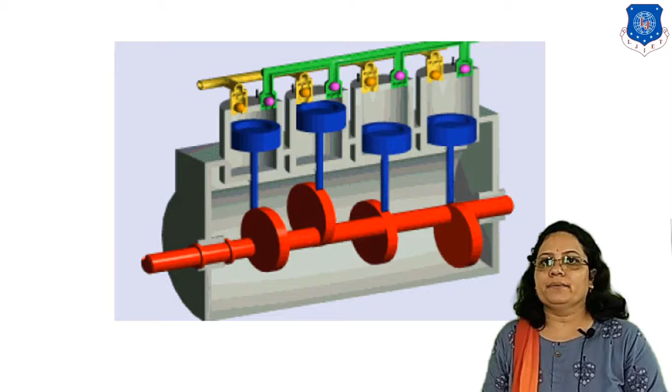This is on internal combustion engines. In the previous lecture, we covered the design of piston, function of piston, material for the piston, design of piston head, piston crown, and piston pin. In today's lecture, I will cover the connecting rod.

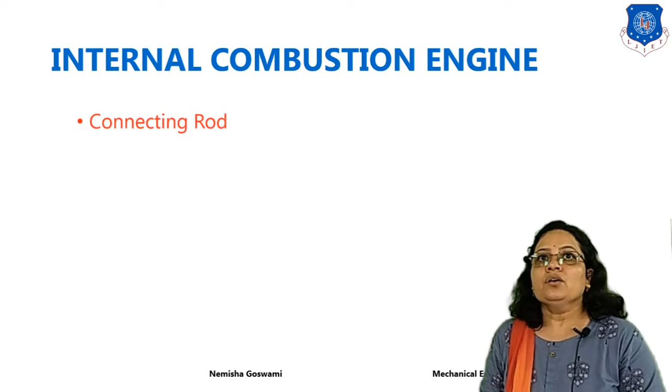What is an internal combustion engine? It is an engine where combustion of the fuel takes place inside the cylinder. The components of an internal combustion engine are cylinder, connecting rod, piston and crankshaft. These are the four basic components.

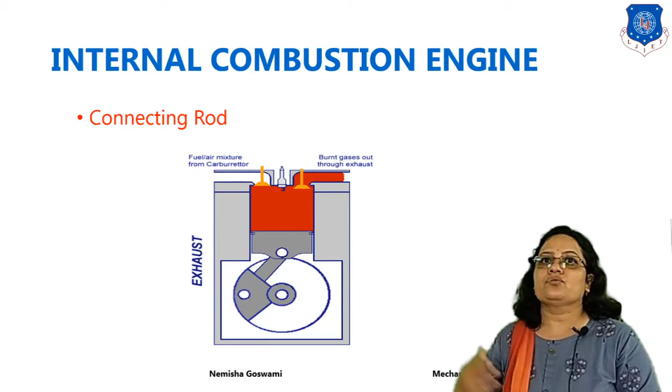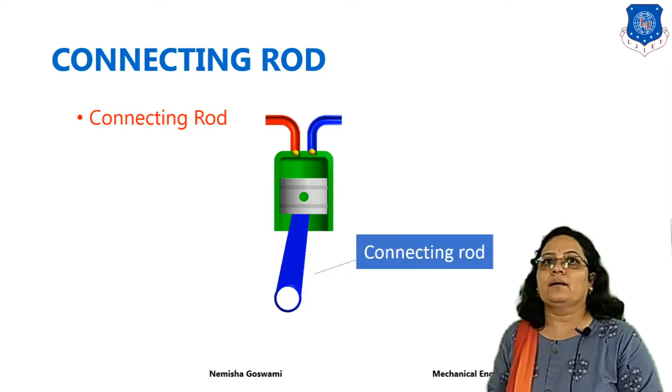Certain strokes - intake, exhaust, compression, expansion, combustion - all take place during operation. The connecting rod is connected at one end to the piston and at the other end to the crankshaft. Whatever energy is received from the piston, the connecting rod transfers that useful work to the crankshaft, and finally the output is obtained on the crankshaft.

So what is a connecting rod? What is its function? This question will arise in our minds. The connecting rod is used to connect the piston to the crank or crankshaft in a reciprocating piston engine.

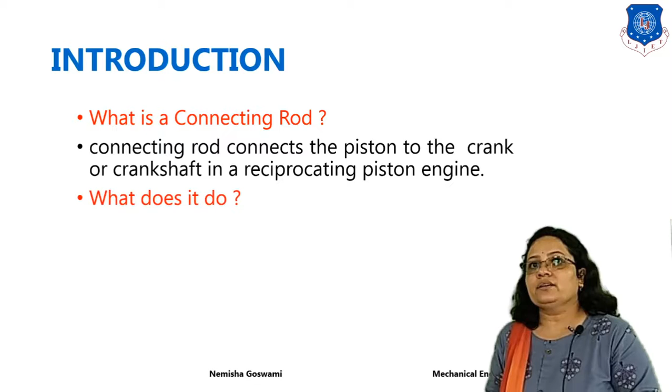Now what is the function of the connecting rod? It transmits the thrust of the piston to the crankshaft. Whatever useful work is generated inside the cylinder is transferred to the piston, then to the connecting rod, and the connecting rod transfers that useful force to the crankshaft.

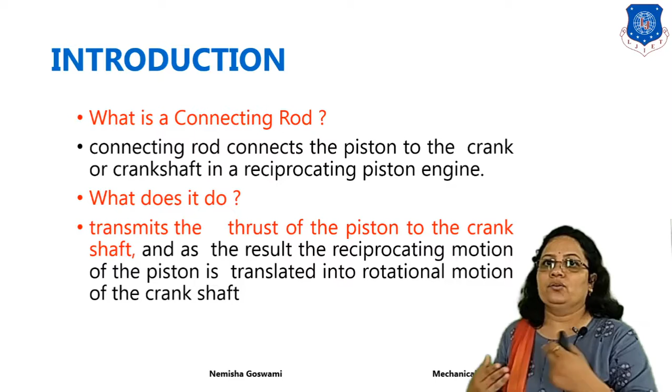As a result, the reciprocating motion of the piston is transferred to the rotational motion of the crankshaft. The connecting rod has oscillatory motion, the crankshaft has rotary motion, and the piston has reciprocating motion. So there is a chain of links: reciprocating motion of the piston is transferred to oscillatory motion of the connecting rod, which is transferred to rotary motion of the crankshaft by useful work. This is the function of the connecting rod.

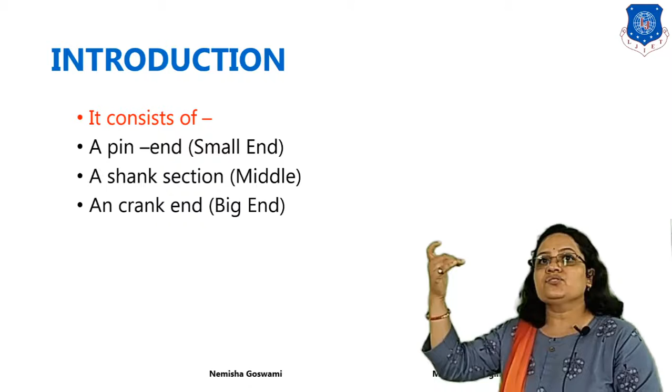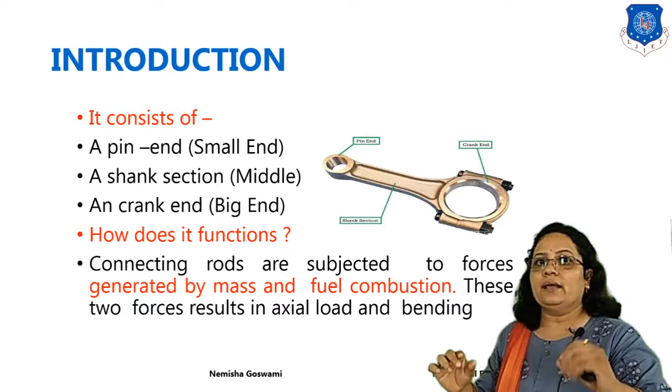Now how does it function, or how does it work? Connecting rods are subject to two different types of forces, generated by the mass of the components and by the combustion of the fuel. These two forces result in axial loading and bending.

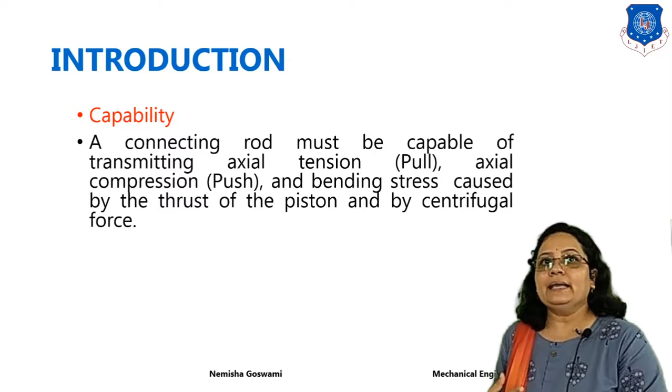Next, what should be the capacity of a connecting rod? A connecting rod should be capable of transferring axial tension or axial compression - you can say pull and push - and bending stress caused by the thrust of the piston and by centrifugal forces. It should be capable of transmitting all these forces.

Now, what cross section of the connecting rod will we consider? There are several types of cross sections available for the connecting rod. It may be rectangular, circular, tubular, I-section, or H-section.

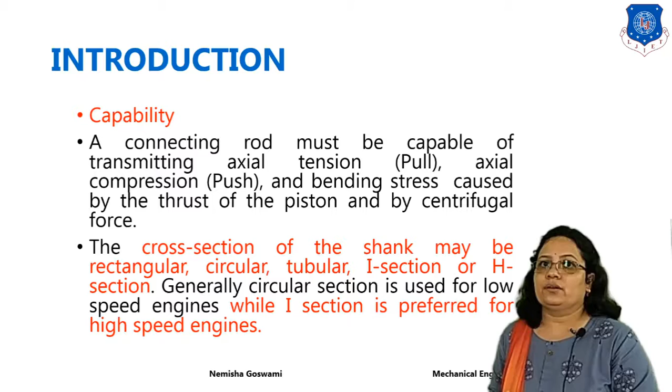So what section will we prefer for the designing purpose? For low speed engines, generally circular section is considered, and for high speed engines, generally I section is considered. In this lecture, I will design the connecting rod by considering the I section for high speed engines.

Connecting rod is a machine member which is subjected to alternating compressive and tensile forces. So how do we design a connecting rod, since both tensile and compressive forces are present? We have to find out which force is larger. In a connecting rod, compressive forces are more than tensile forces.

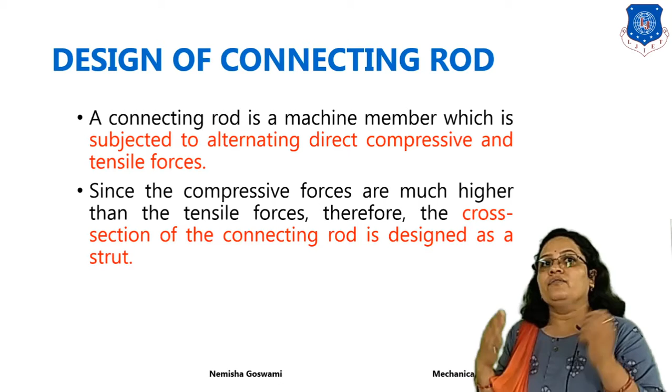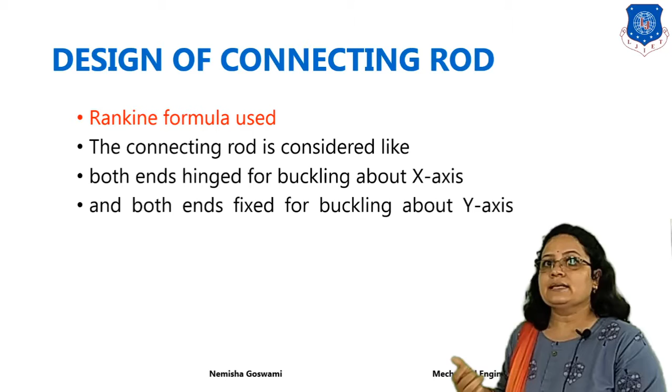So these connecting rods are designed as a strut. A strut is a member having large compressive force compared to tensile forces. So we generally design the connecting rod using the Rankine formula. For this, we have to consider the end conditions for the x-axis and for the y-axis. Both ends hinged is considered for buckling about the x-axis, and both ends fixed for buckling about the y-axis. These are our considerations in the Rankine formula.

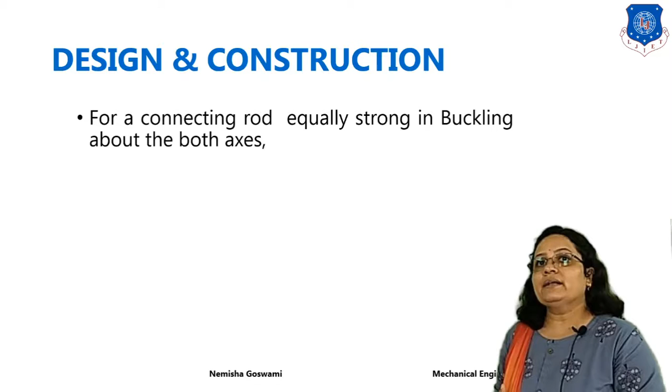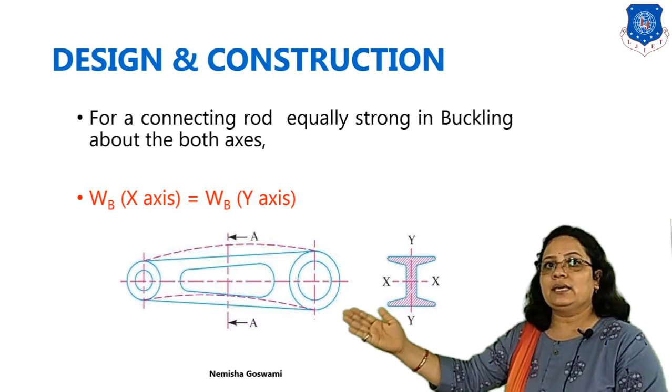When we consider the connecting rod equally strong in buckling about both axes, the buckling load about the x-axis should be equal to the buckling load about the y-axis. You can see here, this is the I section I have considered.

So what is the design and construction? According to Rankine's formula, when both ends are hinged, capital L equals l, where capital L is the equivalent length and l is the length of the connecting rod. The buckling load is given by sigma C times A divided by 1 plus a times (L divided by Kxx) whole square, for the x-axis. Here sigma C is compressive stress, A is area, and a is a constant which has different values for different materials.

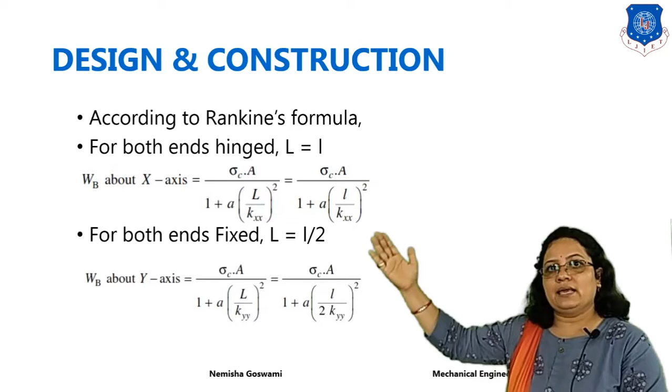Capital L is the equivalent length, and K is the radius of gyration about the x-axis. When we consider both ends fixed, capital L equals small l divided by 2. Putting this value into the formula gives us this mathematical equation.

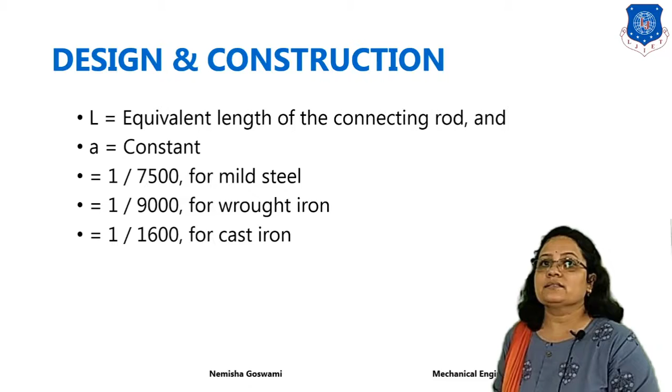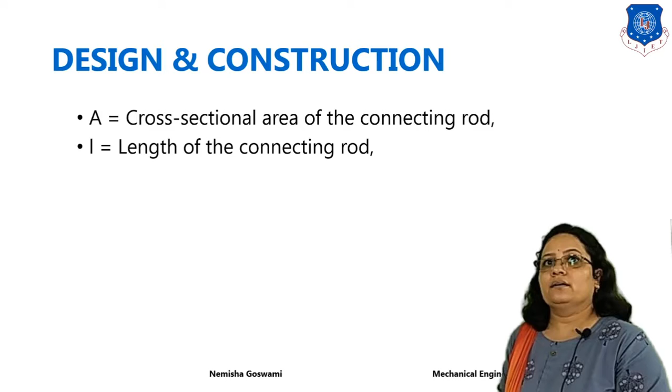Now, L is the equivalent length of the rod, and a is a constant which is different for different materials: a equals 1 divided by 7500 for mild steel, 1 divided by 9000 for wrought iron, and 1 divided by 1600 for cast iron. These values are constant for different materials.

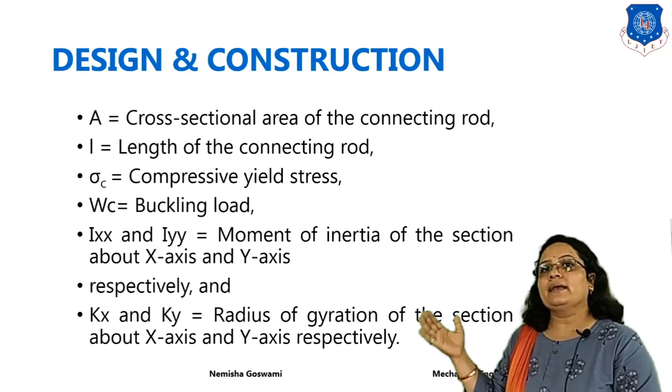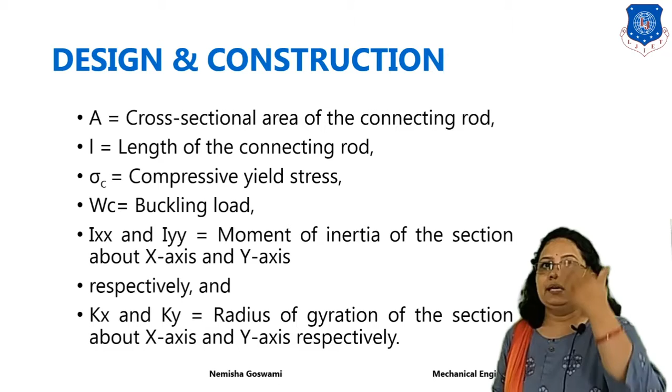A is the cross sectional area of the connecting rod, small l is the length of connecting rod, sigma C is the compressive yield stress, WC is the buckling load, Ixx and Iyy are the moment of inertia of the section about the x and y axes respectively, and Kxx, Kyy are the radius of gyration of the section about the x-axis and y-axis respectively. These are the basic fundamentals of the connecting rod.

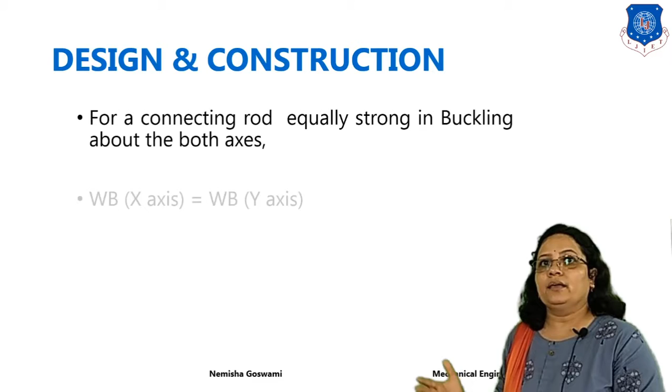Now, for the connecting rod to be equal in buckling about both axes, the buckling load about the x-axis equals the buckling load about the y-axis. Equating these two equations from the previous slides, we get Kxx squared equals 4 times Kyy squared.

But moment of inertia I equals area into radius of gyration K squared. Putting this value into the equation, we get Ixx equals 4 times Iyy. So that was the connecting rod design. Thank you.